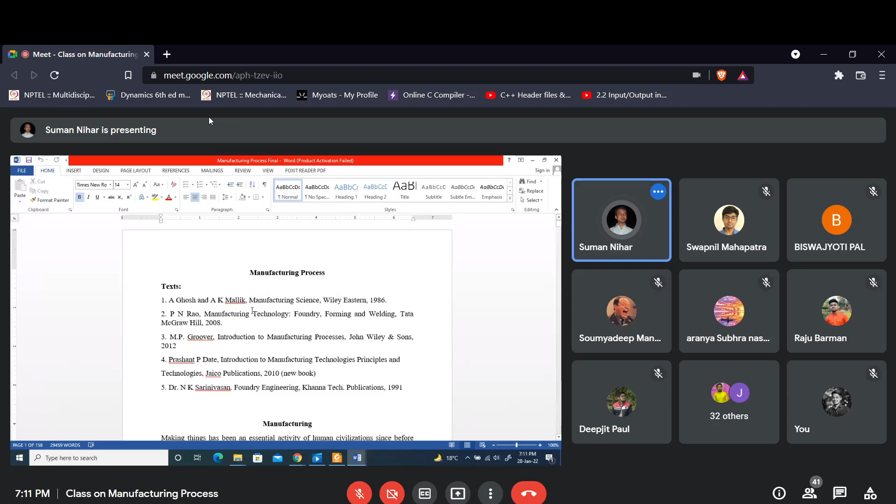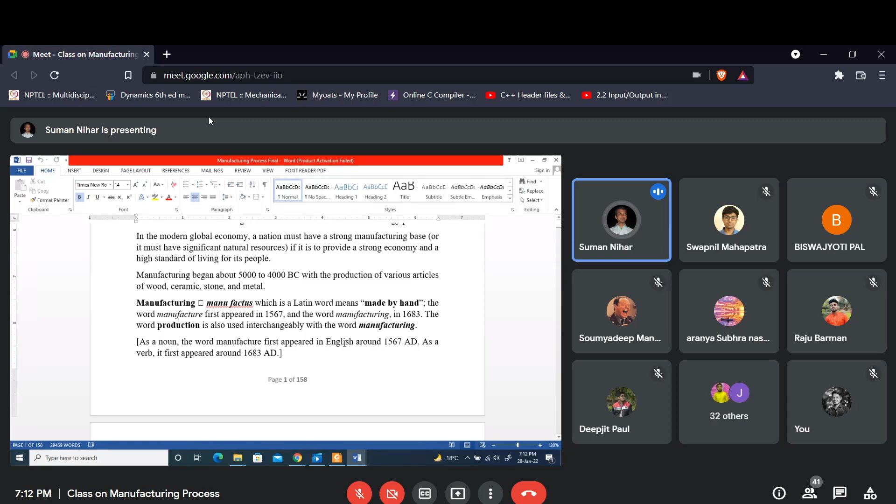So the word manufacturing comes from the Latin word manufactus, which means made by hand. I have mentioned that as a noun the word manufacture first appeared in English around 1567 AD, and as a verb it appeared in 1683 AD.

I have told this thing, that historical note: it is the human's discovery and invention of materials and processes to make things, and the development of the system.

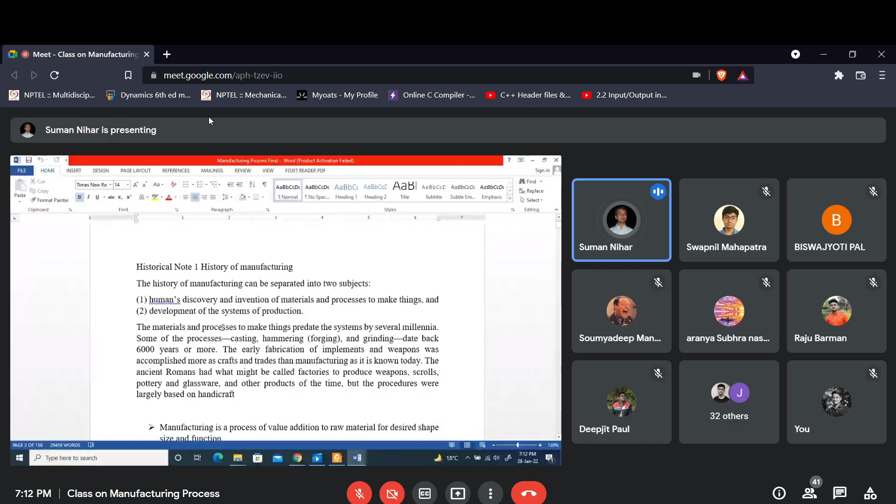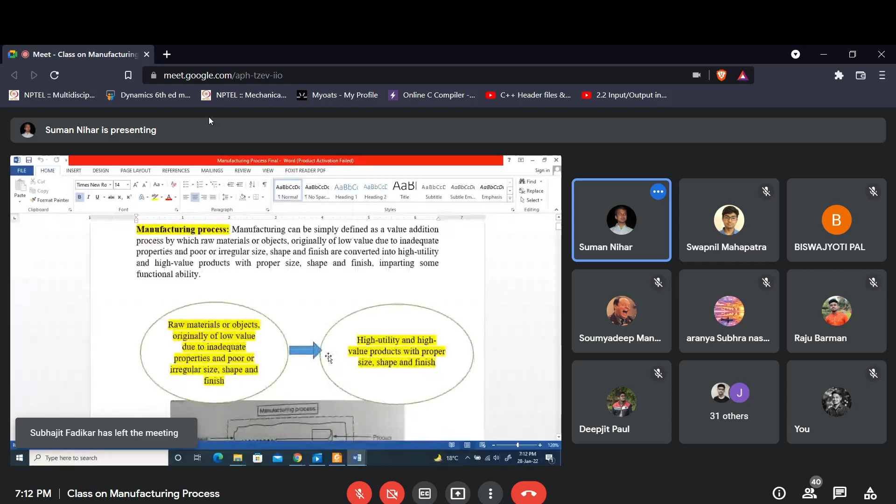So here you can see the raw material is the input, and the output is basically the finished product. Here we can clear our concept from this: the input, that is the raw material or object, is originally of low value due to inadequate properties and poor or irregular size, shape, and finish, and that will be converted into a high utility and high value product with proper size, shape, and finish.

Okay, yes sir, okay.

Abdul Rahman Mia, first one - Abdul, can you please tell me what can you understand from this diagram? Can you explain anything from this diagram?

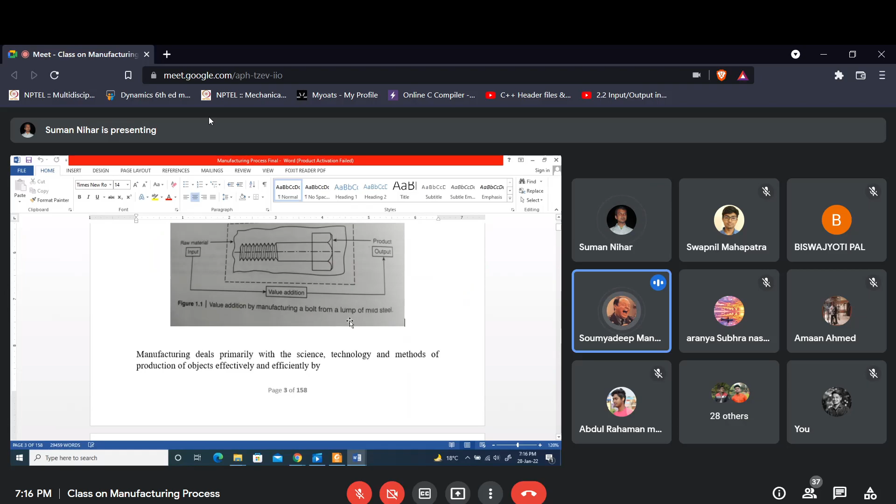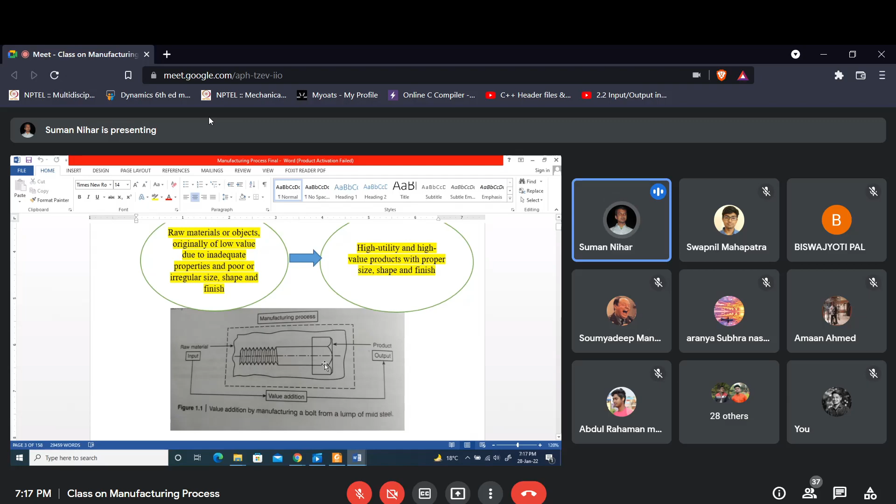Okay, so both of you have answered correctly. This one is basically your raw material which is originally of low value. This is the input of this manufacturing process, in which other things are there, that is machine, manpower, power, and after that we are getting this product. So here some value is adding. You have correctly said.

So the thing is that in case of manufacturing, we have to think that we have to appropriately select the input. There will be some appropriate selection of input materials, tools, machine and environment, proper selection and application of the suitable manufacturing process, improvement of the existing material and processing method and system, development of new material, system, process and technique. However, all the material, process, system and technique must be technologically acceptable, technically feasible, economically viable and environmental friendly.

So whenever we go to manufacture something, we have to select it appropriately. We have to select the material, the tool, the machine and environment, and the suitable manufacturing process. We have to select proper material, method, system, and all this process should be technologically acceptable, technically feasible, economically viable, and environment friendly.

So the manufacturing technology is continuously and rapidly advancing to meet the growing demands.

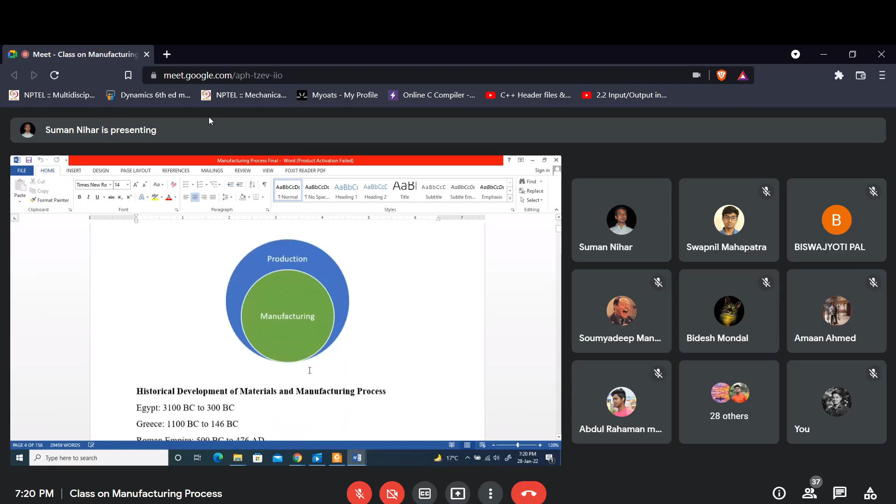Okay, okay, okay. Next I will come to this. Before that, I will tell you something, I'll talk with you.

So in this case, that is basically manufacturing, that is what is going on in this manufacturing. It is transforming the material into a greater value by means of one or more processing, assembly operations. So basically, manufacturing is adding some value to the material by changing its shape and properties.

So when the iron ore is converted into steel, some value is adding. When the sand is transformed into glass, there also some value is basically adding. So in this case, we have to understand another term we often listen to, that is production.

So we will have to think of it. Basically, these two words, that is manufacturing and production, are often used interchangeably. Is it or not? Which two words did you say, sir? Manufacturing and production. Okay.

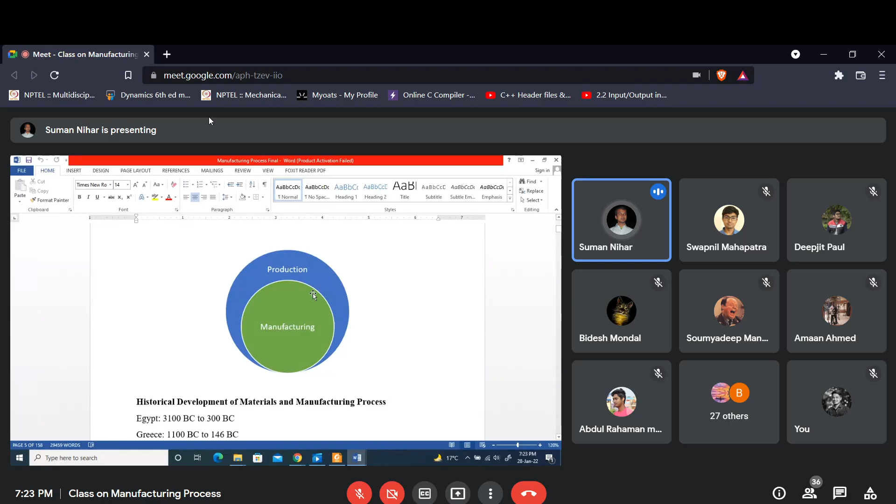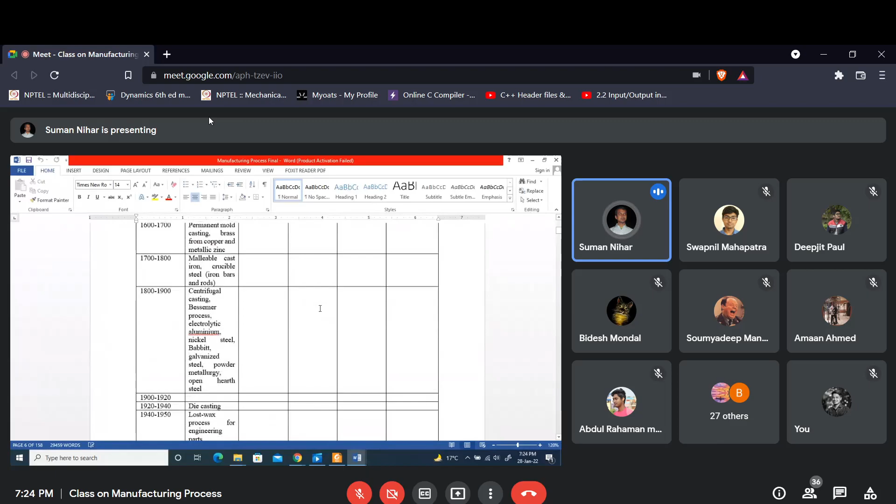So now, in case of manufacturing, that is coming under production. Basically, these two words are used interchangeably. So you can understand that sometimes we say production, sometimes we say manufacturing. Production is a term used in a broader sense.

In case of production, basically we add some value into the product. That means, as I told you, the ore that is converted into steel is basically manufacturing, so manufactured. The ore is of lower value, and when we manufacture steel, that is of higher value.

I think this was a very easy thing. Yes sir, this much we understood, sir. Yes sir.

Okay, now my question to all of you, this is the brainstorming session. What can be the different ways of manufacturing? In what method can you make something? Can you give me some idea in Bengali, English, Hindi, or your own comfortable language? Tell me, in what process can something be made?

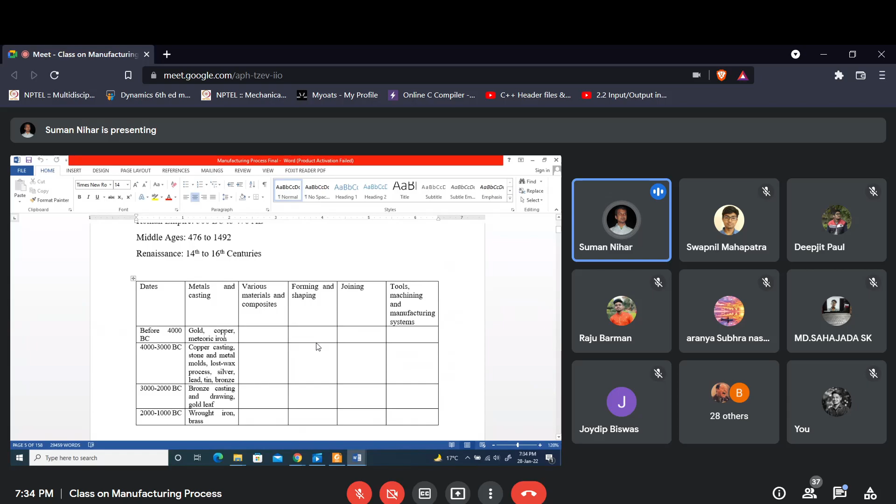So in manufacturing, basically going to my material - here some history is there. I think this is taken from your Kalpakjian. Some history is given, I was trying to make it but it has not been completed. So the chronological development of the manufacturing process - basically the oldest and simplest method is casting.

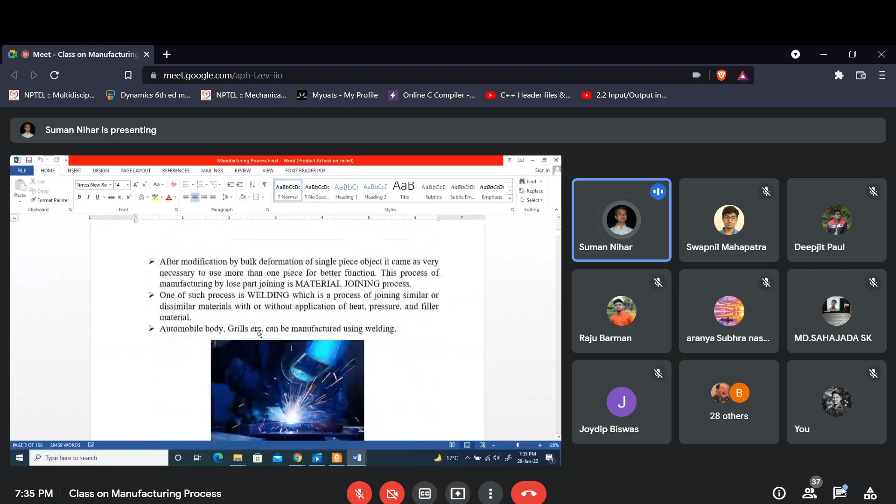Then there is forming, then welding, then metal cutting, and the non-conventional machining process. All these things are there.

So is this diagram visible? Yes, sir.

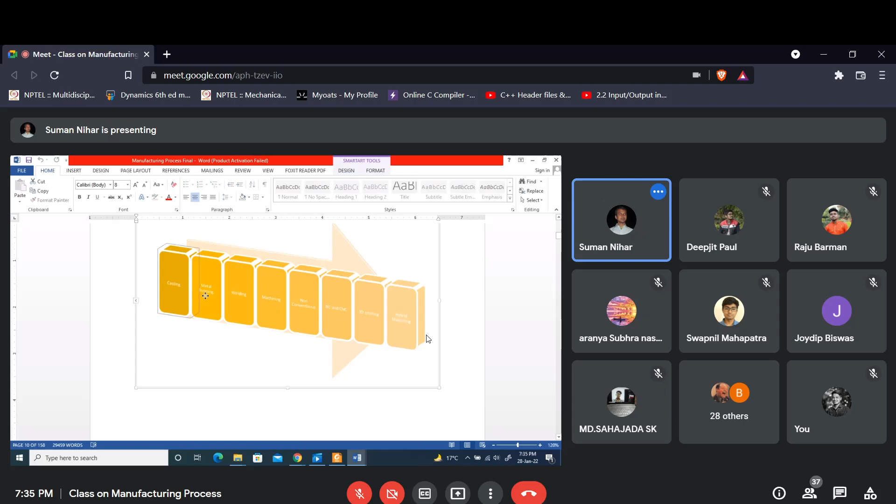So here you can see the summary: there is casting, that is the older process. Then metal forming, welding, machining, non-conventional machining process. Then your CNC machine. Now it is 3D printing, that is additive manufacturing process. Then your hybrid manufacturing process.

In this diagram also you can see it has been given that shaping or forming. In shaping there is casting or injection molding, forging, rolling, extrusion, drawing, powder metallurgy process, metal removal process, machining, and welding. In shaping and forming there is casting and forming. Apart from that, your regenerative process: fused deposition modeling, laminated object manufacturing, selective sintering, stereolithography - these processes are there.

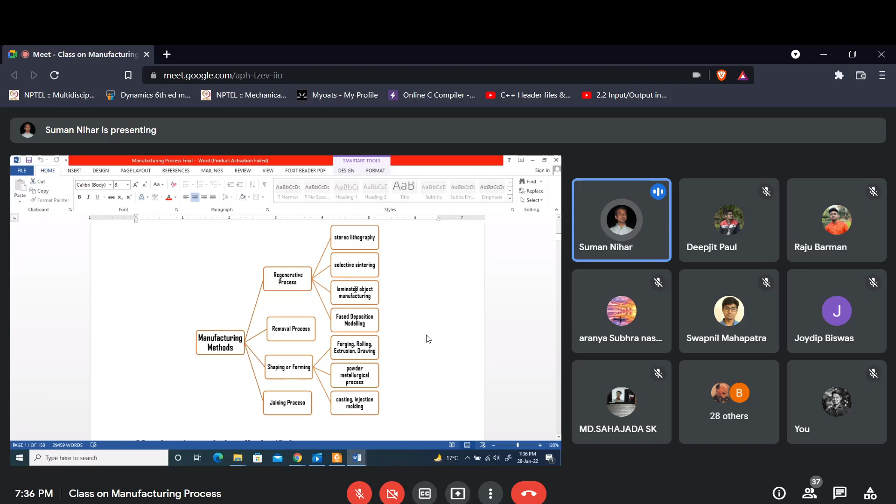Now what I will brief you from our discussion is that in mechanical engineering, there are several manufacturing processes which will produce mechanical components, mechanical devices, mechanical elements in this process, which are primary manufacturing processes: casting, forming, welding.

So in this subject, we will know elaborately in detail the different processes of casting, different aspects of casting. You will know about metal. Then the next chapter will be metal forming. Then there will be welding.

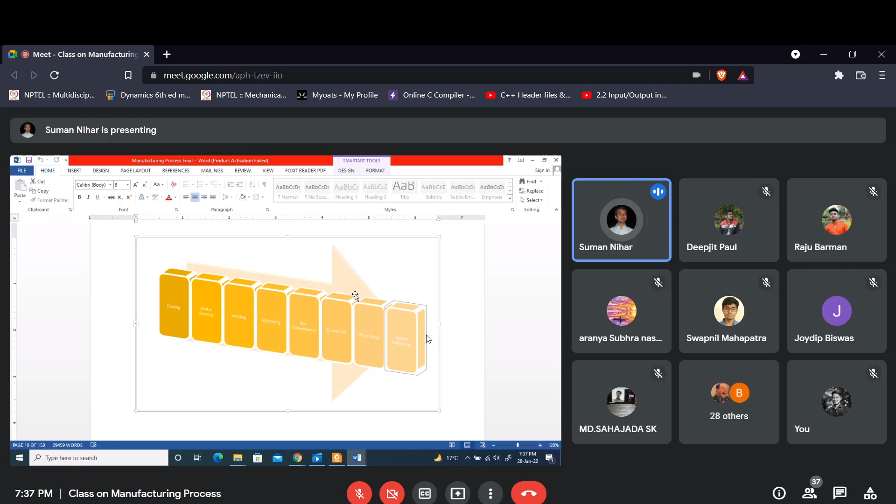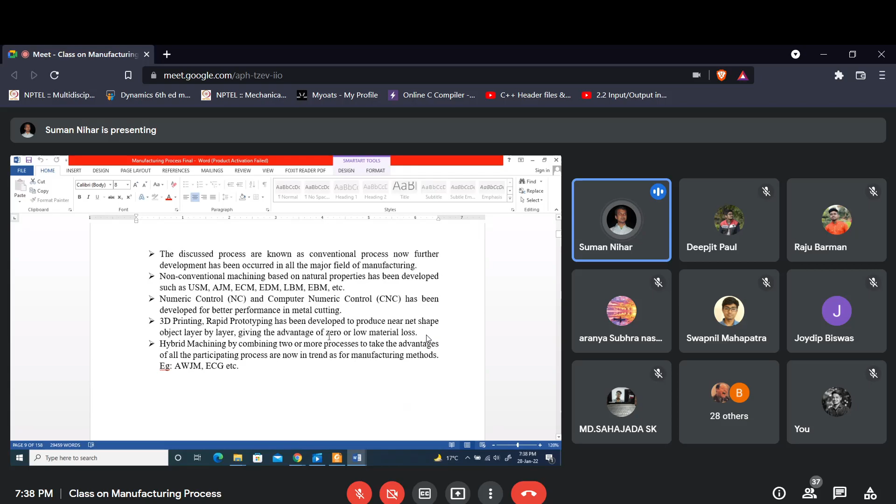So as I have told you, giving the example of casting process - making of a candle - that is a very simplified form. But whenever we go to casting related to mechanical industry, that is basically complicated and difficult, because we will have to deal with hot metal.

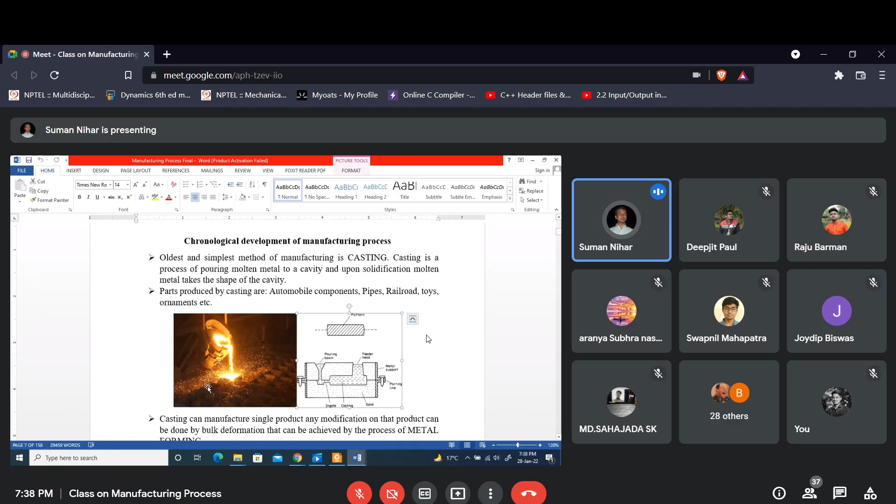So here in this picture you can see hot metal being poured into different cavities. So in this casting process, basically there are 4 or 5 things happening.

That is, you have to think that we will make a product. So for that we have to make a design. Okay, suppose we want to make a 3D object.

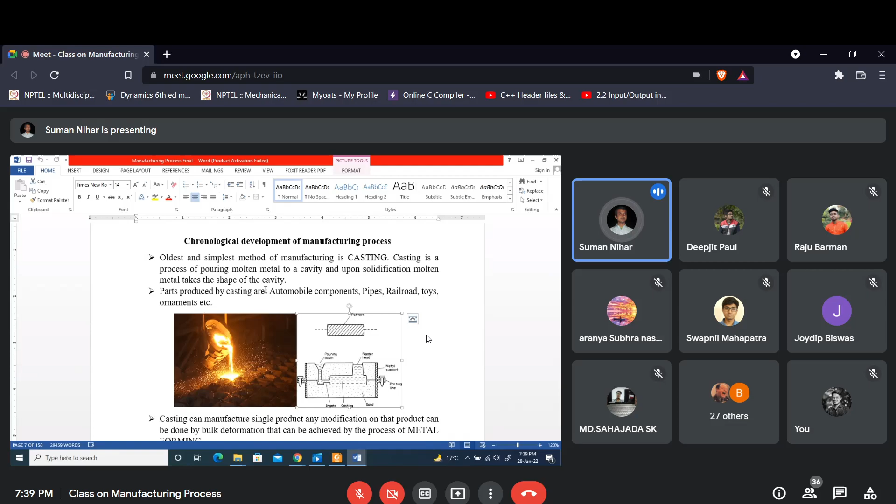So we have to think of it. After that we will make a hollow cavity of similar shape and size. The cavity which we made in a place or system is called your mold. So the cavity which will stay belongs to a mold, wherein in that empty hollow cavity we pour the liquid metal, and after solidification we will get the final product.

So here the major concern is that we will pour hot metal, not simple molten wax. So here we will have to deal with the mold, we will have to deal with the pattern.

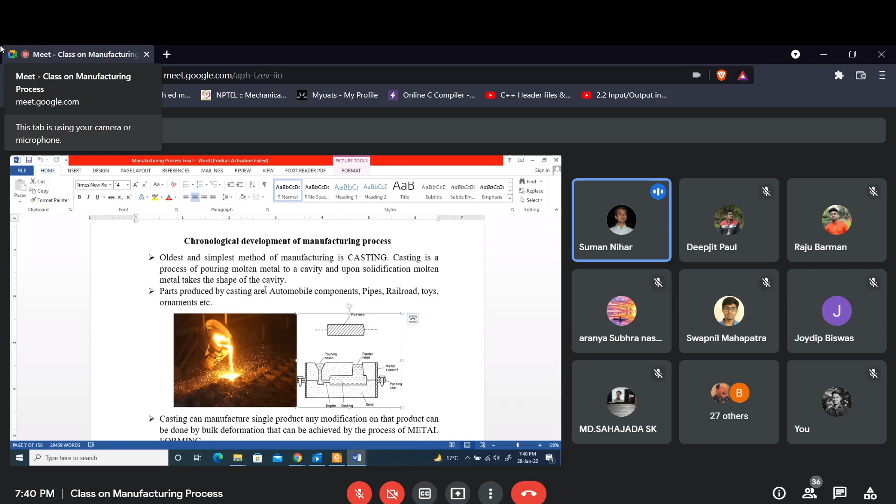So the thing is, suppose we made an arrow. So first there will be our design product. From that you have to make a pattern. With the help of this pattern you will make your mold cavity, in between, basically in the mold. And in this mold you have to pour your molten metal. After that it will be solidified. Then there will be your final product.

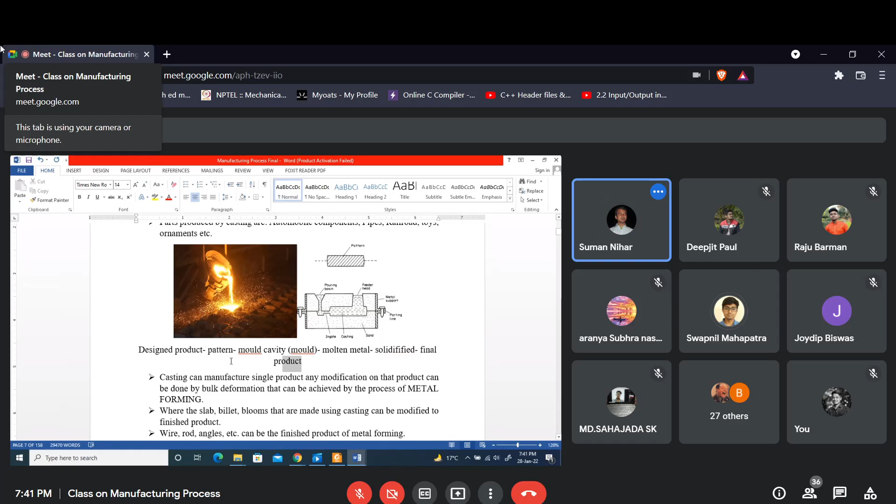So the conception behind the fundamental thing is basically you have to design a product.

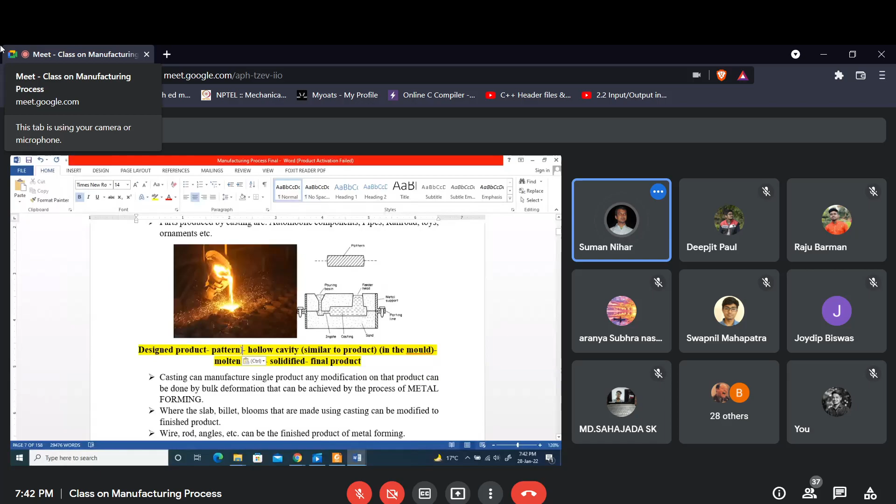With the help of the pattern we will make a hollow cavity. In that hollow cavity we will pour the molten metal, and after solidification of the molten metal, we will get the final product.

So here two important things are coming: your pattern, and your hollow cavity in the mold. So that is the mold, and then coming next is solidification.

That means here that thing is coming, that is your solidification, and after that we will get your final product.

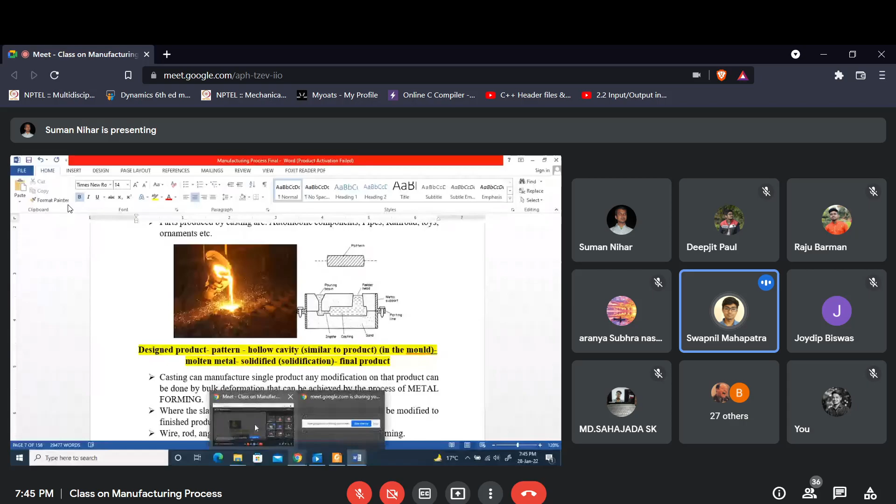So when we get that product, the surface finish, the surface roughness, that will not be as per our requirement. So we need to basically perform the process that is called fettling.

I think that is there, and when I teach you there, I will tell you about that.

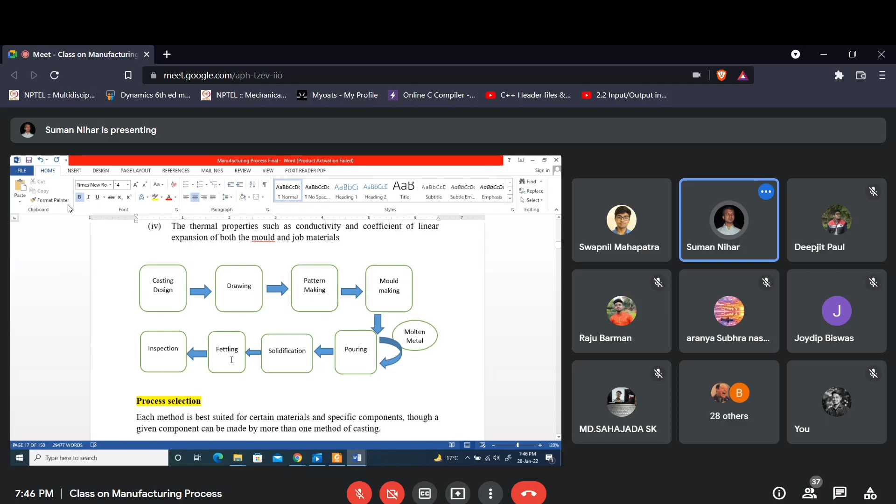I will come to that when I enter into the subject that is your casting.

So before that, what we have to think about, what basically we will look into the matter in the topic of casting, that will go as you think about what this chapter covers, what we will read, what we will know.

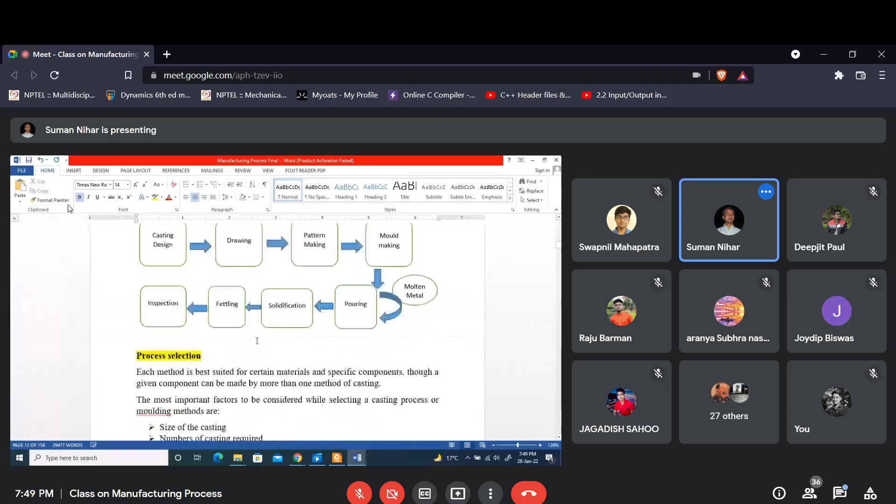যারা যারা আছো তারা বুঝতে পেরেছো? Have you understood? Yes, sir. Yes, sir.

আমি যেটা বলতে চাইছি, আমি জানি যাদবপুরে এই লিবার্টিটুকু ছাত্রদের সঙ্গে টিচারদের রয়েছে, যে আমরা যতটুকু পড়বো ততটুকু জানি। আমি বদার নই whether the class is 30 minutes or 1 hour or 1.5 hours, বাট যতটুকু করবো একটু জানবো, শিখবো - এটাই আমার প্ল্যান, এভাবেই ক্লাস প্রোগ্রেস করার কথা ভেবেছি। তোমরাও বুঝতে পারছো যে এই অনলাইন ক্লাস নেওয়াটা একটা ডিফিকাল্ট বিষয়।

তোমাদের পক্ষেও সবথেকে বড় ব্যাপার হচ্ছে তোমাদের মোটিভেশনটাকে ধরে রাখা, তোমাদেরকে ইন্টারেক্টিভ করা। আমরাও যদি ছাত্র হিসেবে থাকতাম তখনও এই সমস্যাগুলো হতো। যারা থাকবে চেষ্টা করবে ক্লাসের সময়টা একটু শোনা বা বোঝা। আমি জানি তোমরা ক্যারিয়ার ব্যাপারে সিনসিয়ার, তো আমি চেষ্টা করব যতটুকু পড়া অন্ততপক্ষে কনসেপশনটা যেন ক্লিয়ার থাকে, বিষয়টা বোঝো, অ্যাটলিস্ট ইন্টারেক্টিভ মোডে যতটা সহজভাবে বোঝানো যায়।